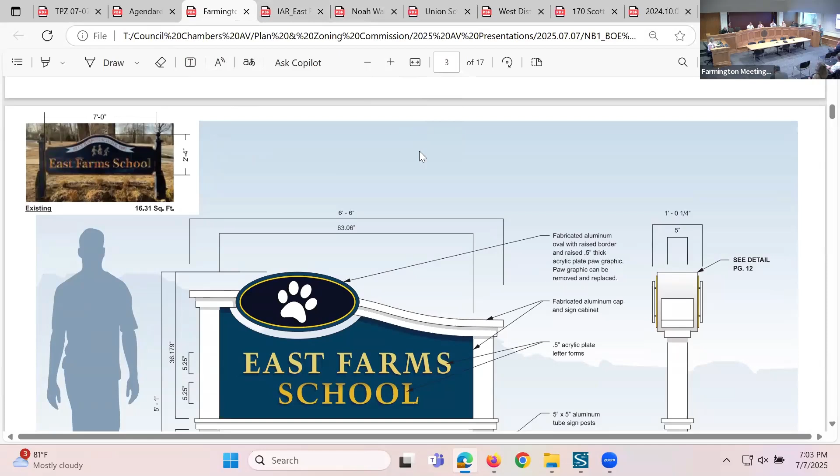Thank you. My name's Lauren Rosen. I own Artfx. We're from Bloomfield, Connecticut. And I just made 119 copies, but I see you have big, beautiful new screens. I don't know if you want copies up close. It probably doesn't matter at this point, but I need just enough for everyone.

Thank you. Thank you. Pass it down. Thank you, sir. Thank you.

Okay, starting with East Farms School. Essentially, we looked at every location and the signs that are existing are older. They're in kind of tough shape. And we decided to come out with a system that was somewhat thematic, where each school would have a logo or an insignia embedded into the sign. And then the sign would feature the name of each school with dimensional lettering. Typically the signs that we're building, we try to use aluminum plate.

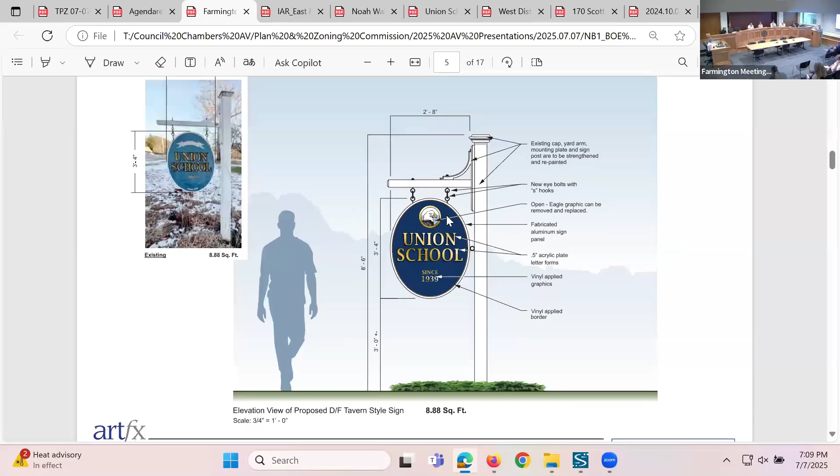We're making a new oval sign, so the sign itself is brand new. That will be welded 1/8 inch plate, with a structural inside of 2x2 tubing, which is also 1/8 inch aluminum. Everything's welded. This particular sign is cut through up top, so that circular component is a see-through, and within that see-through is the school logo or insignia, which is an eagle. So you'll see the same eagle from both sides facing toward the school.

Lettering is raised. The lettering on the bottom, since 1939, is an applied vinyl graphic, which will be a sprayed finish to match the sprayed finish of the letter forms. There's also a cove molding around the perimeter that will also be sprayed a metallic gold to match the lettering. It's new hardware, which is not that significant, but a little bit stronger than what's up there now. And that's Union School.

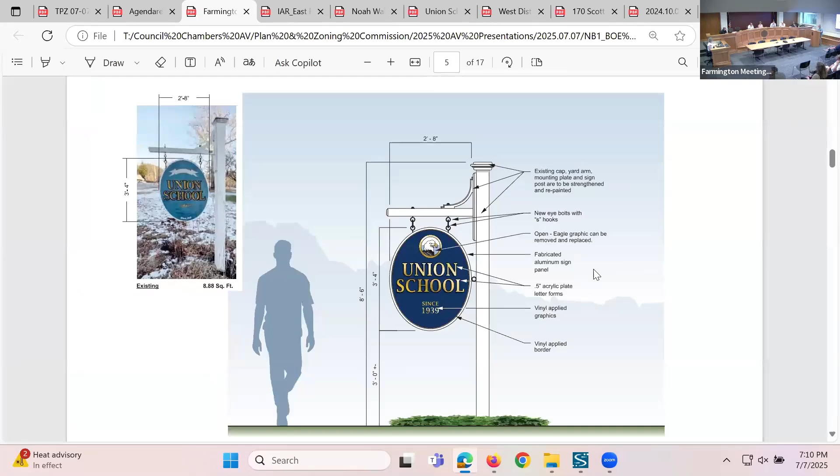There's an existing pedestal at the West District School, which is in fairly good shape. It's a little bit unusual in the sense that it's only a brick's worth thick, which is about 8 inches. One of the thinner pedestals I've seen, but we looked at it and tested it out, and it was actually in pretty good shape. What we decided to do was to manufacture a new capital for the top, a crown molding with an arch in the center.

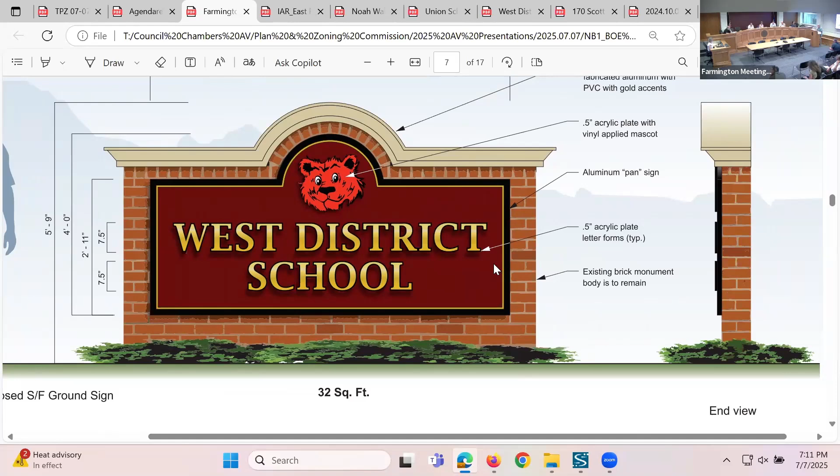It was actually kind of expensive. We tried to figure a way to make it where it wasn't so expensive, and in the long run we gave the school a discount, or the school board. So I think that really gives some substance to that otherwise thin structure. The sign is a one-to-one replacement with the sign that's there now.

It's a dimensional 1.5 inch thick sign that's also 1/8 inch aluminum plate. The tiger, the insignia, appears to be a little bit bright in this particular shot, but that and the lettering, again, are 1/2 inch raised acrylic that's sprayed. All the finishes are low luster. The details in the tiger, along with the eagle, will probably be done with a brush and enamel paint.

Molding is black, and there's a gold inline to match the lettering. I was looking on Google and I noticed that a massive, I think it was either a blue spruce or some type of evergreen, was taken away from this area. So it's a nice freestanding sign without all that encumbrance. It looks nice now.

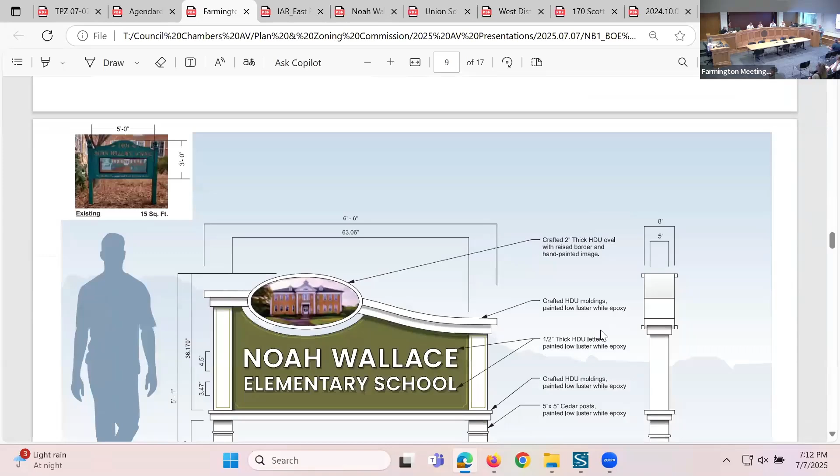So Noah Wallace, we had to be careful, since it's part of the historic district. Same format as the other signs, except that we used kind of a traditional moss green. There's not much of an insignia except for what will be a painted graphic of the old portion of the school. We'll be painting that by hand. Some pretty good artists, so it'll have a nice look to it.

Some added moldings, some insets, a couple of traditional motifs. Lettering in this case is white, also raised, also with an airspace between it and the background.

We talked about this sign, and right away, I think your average person off the street, when thinking about what constitutes a traditional sign, the answer is wood. And we use a lot of wood. In fact, we use tons and tons of all types of wood. Outside, we use cedar, mahogany, teak, cypress, all the traditional woods that have tannin and are self-preserving.

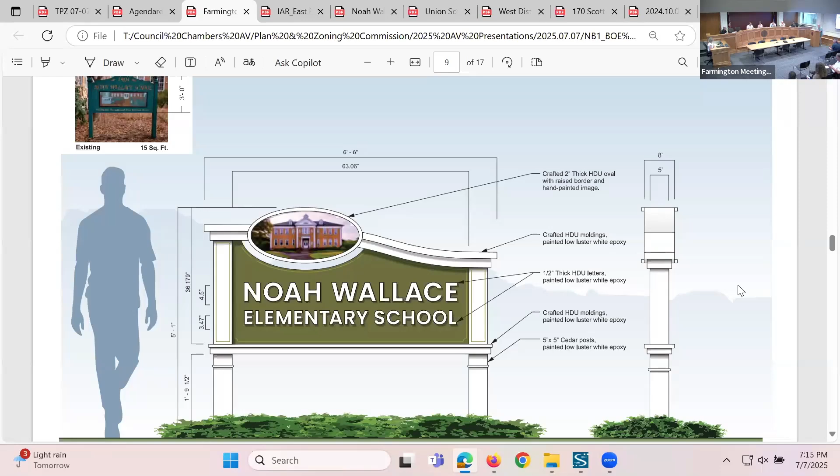So there's a matching ensemble on the building. There's what would be called a directional projecting sign. People are getting confused at times, I don't know if it's new visitors, but there's some confusion about where the main entrance is to the school. So what we did was we selected a tavern style projecting sign.

Again, the same type of materials. The bracket's a custom bracket up top. It's wrought iron - well, we actually mill it from aluminum, but when it's done, it looks pretty much like wrought iron. We throw in a second color around the arrow to give it a little bit of accent, and the lettering, again, is dimensional. It's a sister paired sign with the ground sign that you saw.

A little more work at Irving Robbins. We were out there doing a survey, and a woman who I assumed to be the principal or one of the administrators came out and said, if you're looking at signs, we need something to identify the front of this school. So we looked at it, measured, took pictures, and we're putting in dimensional letters on the front of the school as a secondary ID sign.

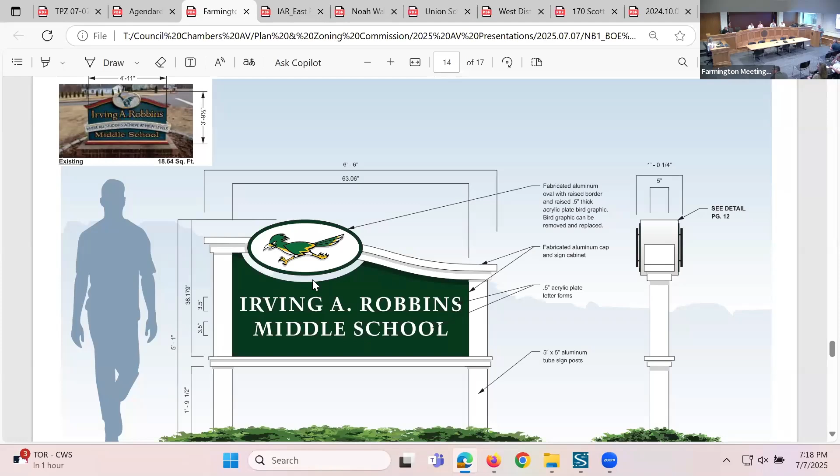Then there is one other sign, a secondary directional that we're posting at the corner, where there's a secondary entrance to the athletic fields. It directs people, one, to the athletic fields, and two, to the main entrance. There's apparently some confusion there where people take that secondary entrance looking for the main entrance. But the administrator and the folks we worked with felt it'd be a good idea to tell people main entrance this way.

Same materials: all structural aluminum posts, structural aluminum signs that are about 1 inch thick. For this type of sign, the footings are 42 inches with an appropriate amount of concrete, and again epoxy finishes that are low luster architectural finish. There's a skirt on the bottom of this post that's probably going to be made of PVC that's sprayed to match.

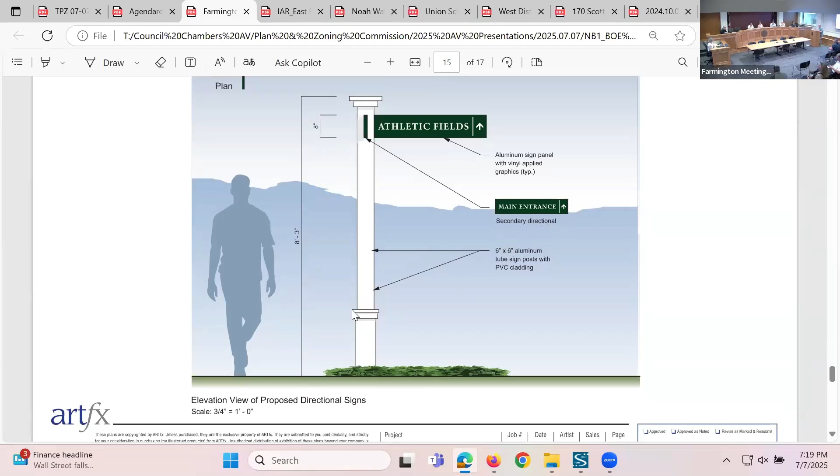And I'll be happy to answer any questions.

Thank you very much, sir. Do you have any questions? No questions, great presentation. Okay.

Peter, how about you, any questions? No, thank you for the presentation. Thanks. Okay, Bruce, just one - what's on the back of the West District sign?

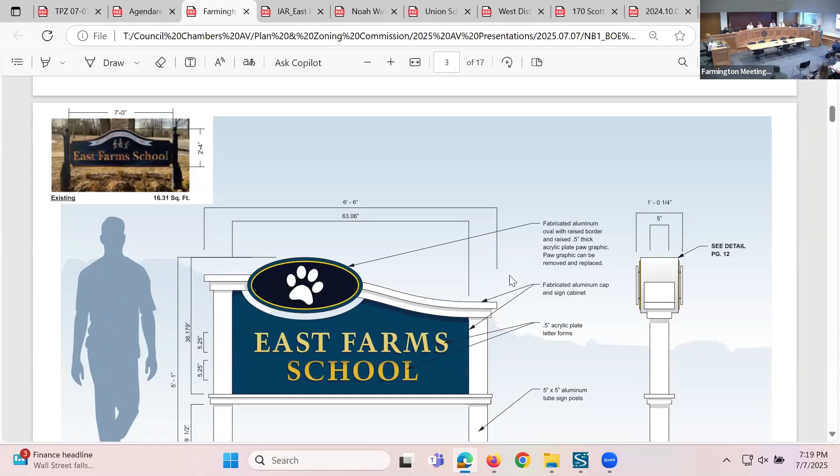Because the others look like they're all two-sided. There's actually brick, there's nothing - it's flat, and it faces the school, the fields. In this case, we maxed out the square footage with the front presentation, which is just under 32 square feet.

And it's been like that for some time, right? Yeah, the brick thing. If it was my property, I might think about three small bushes with some sedum, just to dress it up a little bit.

Right, that's sort of where my head was going with that too. I was wondering if we'd had any issues with graffiti or anything like that at any point, but I guess not. If it's been there for some time, it won't attract anything like that. All right, thank you. Yeah, thanks.

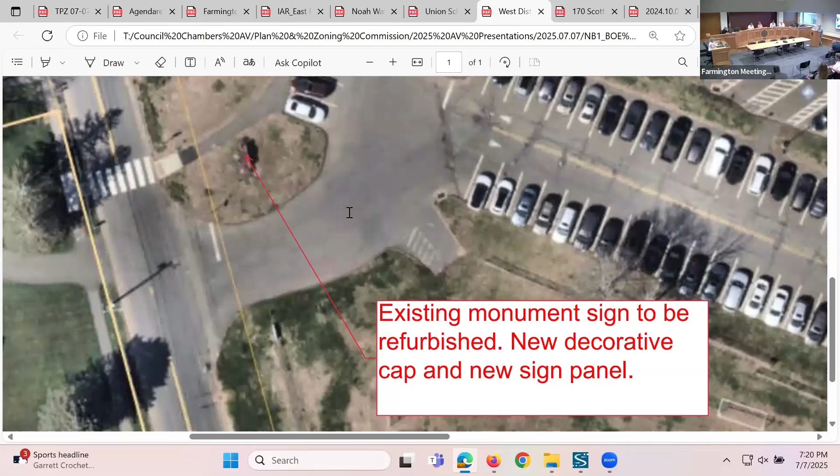Okay Mike, any questions? No questions, thank you for the presentation. Thank you. And Dave?

Hi, nice presentation, these look great. Thanks so much. It's nice to see them and get an idea of what you were thinking behind it. No questions.

Okay, and now it's my turn. My one question is one that I don't know if you can answer. It might be a Shannon question.

Is Union School in the Unionville Historic District? No, it is not. Oh, okay, interesting, I just didn't know. Noah is, but Union School is not.

So the Noah Wallace sign will go to the Farmington Historic District on next Tuesday. But yeah, I was just curious. I wasn't triple sure, but I'm 99% certain it's in the Unionville District.

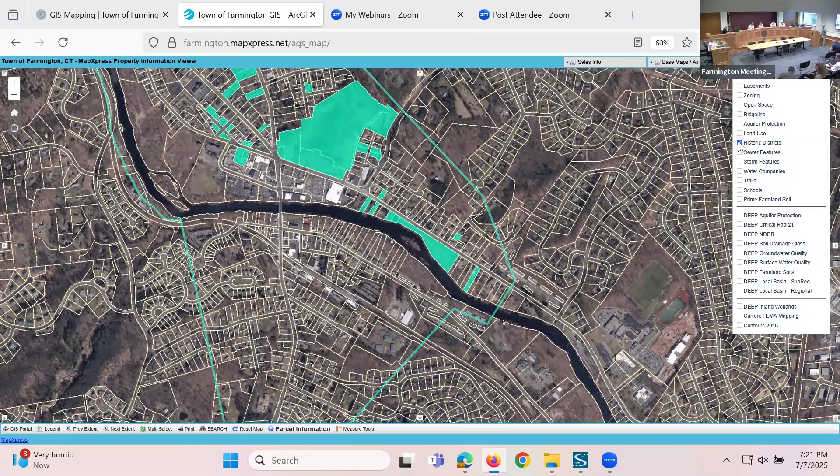Thank you. Our Board of Ed member and a Unionville Historic District member. Thank you, Matt, I appreciate that. I'm pretty sure I double checked that, but yeah, I thought so too.

Okay, thank you. Well, I agree that the presentation is great. I think the signs will be a lovely upgrade, and I assure you they'll last for a long time. When I first started the business 43 years ago, I used to be proud to give these lifetime warranties, but now that I'm older, I think...

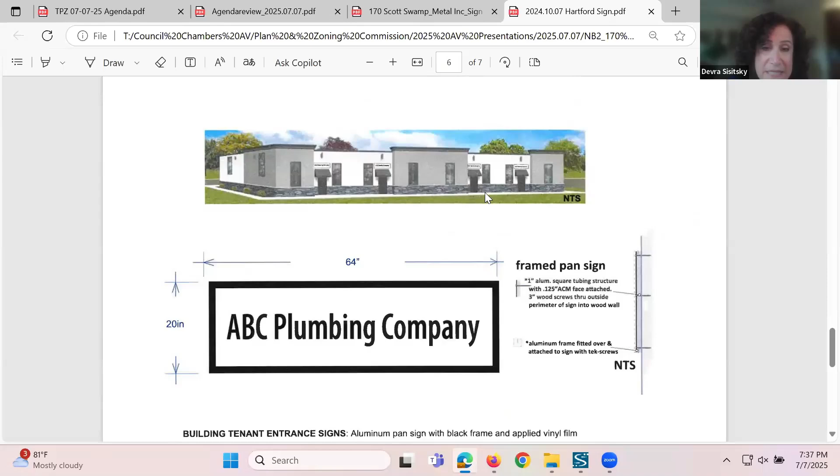I think you guys have seen this before in October when the landlord and Shannon did a great job to go through the plans and okayed these signs for the 4 units. I think what nobody contemplated was that someone might take 2 units and therefore not need 2 signs a few feet apart. So I think you guys did a great job to preserve the clean lines and look of Farmington. When we walked by with Bruce and the landlord, I queried if there's any way to get 1 sign instead of 2 redundant signs to make it cleaner and simpler. You suggested this might be an appropriate line of play to propose to planning and zoning. So we've put together this drawing of the sign, exactly the same as what you approved for the 2 smaller signs, and it's under the 40 square feet at 37.9.

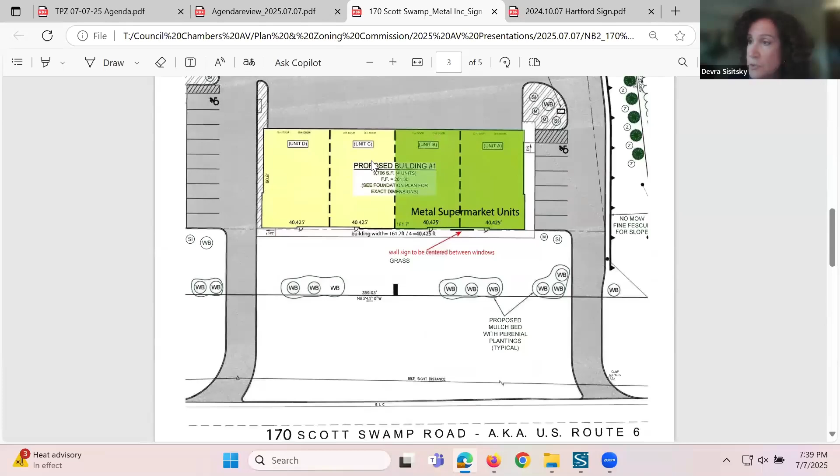I think a larger sign is a little easier to see. I'll speak as a new business owner to the area - I haven't had a business in Farmington since the late 80s, but happy to come back. It's a tight corner coming down route 6 heading towards Bristol, right under the canal sign, and I think a slightly larger sign would be more feasible for people to see and not apply the brakes quickly as they're pulling in. So I'm hoping you'll give me permission to have 1 sign instead of 2 redundant signs, making a slightly cleaner look to the building.

Okay, thank you very much. Commissioners - Bob, no questions, it makes perfect sense to me. Peter, no questions for me, thank you for the presentation. Bruce, no questions for me either. Mike, no questions as well. And Dave?

I don't know if I missed it - is there any lighting on this sign? No. Okay, that's my only question. Yeah, there is an existing wall pack on the building that matches the layout for the entire building. There's another mirror wall pack on the other half. The sign happens to be under that wall pack, just how it's centered between the 2 windows. Oh, okay, thank you.

Okay, I guess it's my turn. The lighting was going to be my one question. It does keep a simple look and is easier to see. Okay, I think all my questions have been answered. Thank you. Are we ready to vote, everyone?

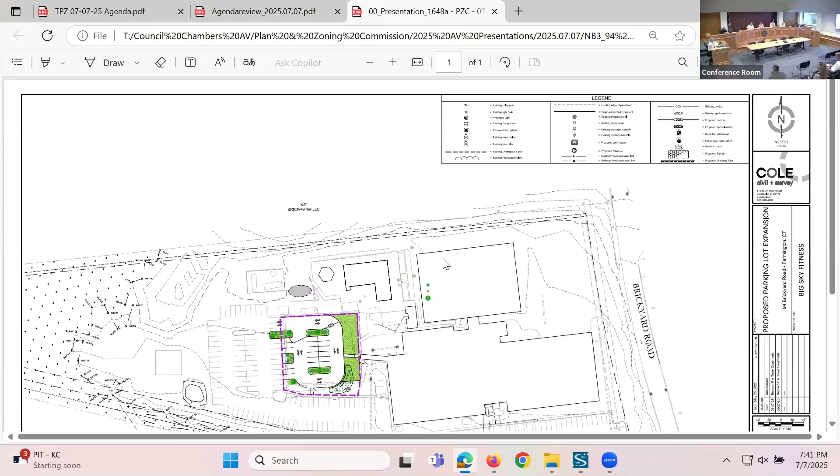Brian, are you there? Yep. Thank you very much, Shannon. For the record, Brian Panico with Cole Civil and Survey, here on behalf of Big Sky Fitness. So this is an existing site.

We went through a few years back with an application to change us to a Big Sky Fitness. There were some improvements done at that point. Everything is now complete, and as they're kind of transitioning and moving forward...

There's an existing clay tennis court on the site, and it is not used. At this time, they would like to transfer that from being a tennis court into additional parking, as they need more. So in removing the tennis court, the fencing, and all the surrounding impervious area, we'll be replacing that with 18 new parking spaces.

Area of development is about 0.42 acres. The site as a whole is 10.5 acres, and we're only proposing modification to basically the area highlighted in purple there, which is less than half an acre.

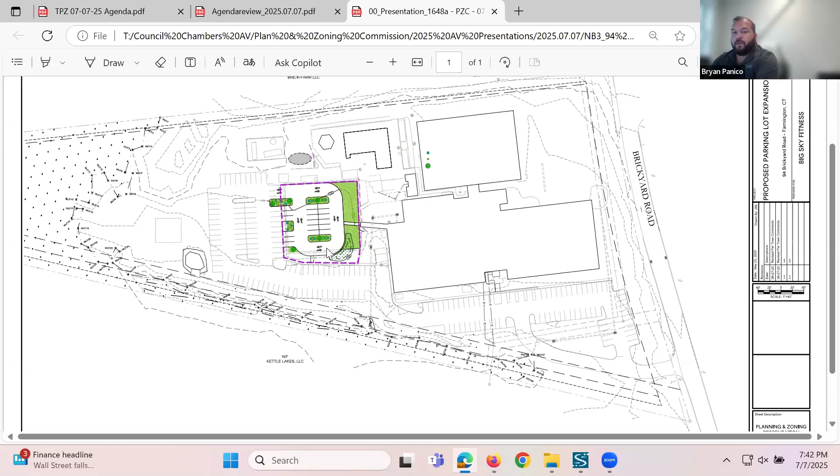We've added 1,678 square feet of additional interior landscaping. You can see that represented in those parking islands, and most of those areas were impervious surface that we're now turning into pervious landscape area. We're also proposing to add 5 new shade trees and a bunch of other landscape plantings in those islands, just to improve the overall look of the parking areas, particularly up against the building there.

We've also looked at this from a storm drainage perspective. While the tennis court was considered impervious surface, the areas with that hatched green dotting throughout were areas of impervious surface that we are now making pervious, or grass. So we've reduced the actual impervious coverage of the site by a little over 3,000 square feet.

There's a recent change from the previously submitted plans. Where Shannon's cursor is there is now a water quality depression. Originally we had those in the landscape islands as little low points. We've since modified that so that in the event that water quality depression does overflow from stormwater runoff, it will be directed to flow toward the existing catch basin to the east in the parking lot.

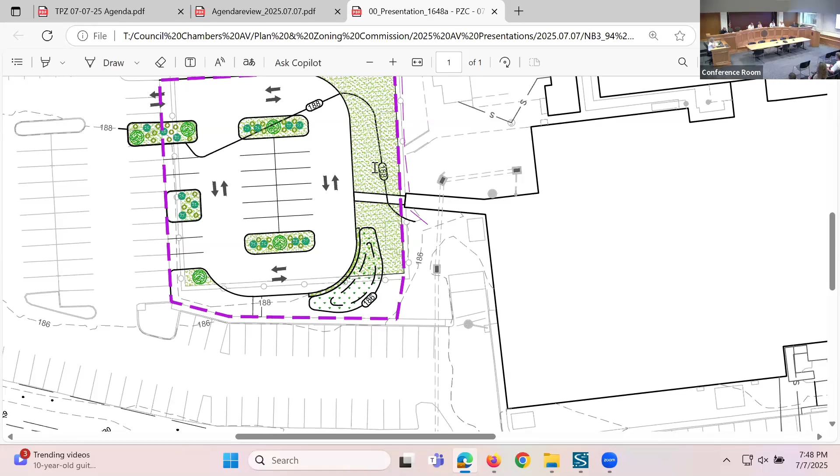Mike? I guess my only question is, do you plan on doing this construction during your business hours? I know from driving by that you guys could probably use the parking spaces because it's always so packed. Do you plan on doing it before, after, during, and would that cause any issues for people who use the gym?

I think just given the hours of operation, a lot of the work would likely have to occur kind of simultaneously, especially just to get it done in a timely and efficient manner. But what I will say is the way we've generally tried to set this up, we're trying to minimize the impacts to the existing parking lot as much as possible. So essentially the 3 parking spaces where you would enter or exit this new parking area would be eliminated in the northwest there.

I would foresee that as almost becoming like a small staging area right up top there. So they could bring equipment onto the site. They could literally back a truck up in that parking area and be loading a truck. So I don't foresee a lot of adverse impact to the existing traffic, especially since this isn't the type of use where people are only in there for 5 minutes at a time very frequently, kind of in and out. People generally are there for a decent amount of time. And I think overall, with some small safety measures, it shouldn't have too negative of an impact on the actual experience of the gym goers.

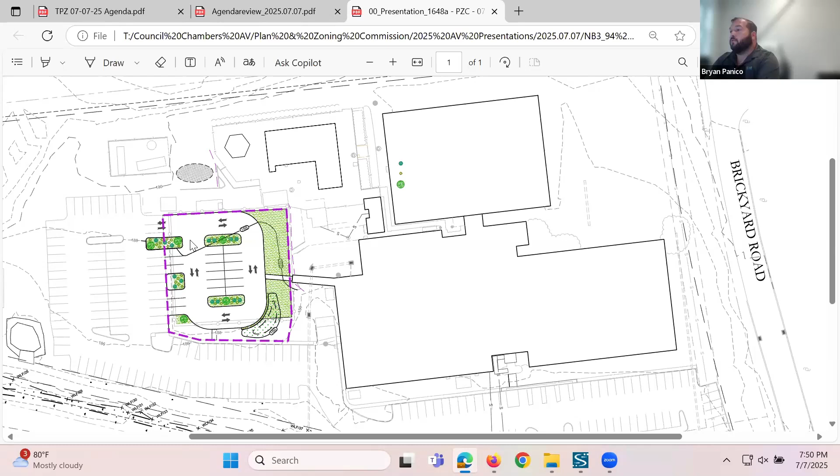Hi, yeah, thanks. Just verifying that you're not going to add any lighting to this area? Correct, we have not proposed any new additional lighting in the area. Okay, all right, thank you.

Okay, I will say that most of my questions have been asked. Thank you for the presentation and the visuals, it's very helpful. Okay, any other questions or concerns? Anything come up? Councilors? Okay, commissioners, excuse me.

Okay, I need a motion and a second, please. Okay, I make the motion that we accept the application for WC Farmington LLC, Big Sky Fitness, 94 Brickyard Road, application for site plan modification for the removal of the existing tennis court and fencing for a proposed new parking area, CR zone. Second. Okay, all in favor? Aye. All opposed? Abstentions? And the motion passes.

Thank you. Thank you very much.

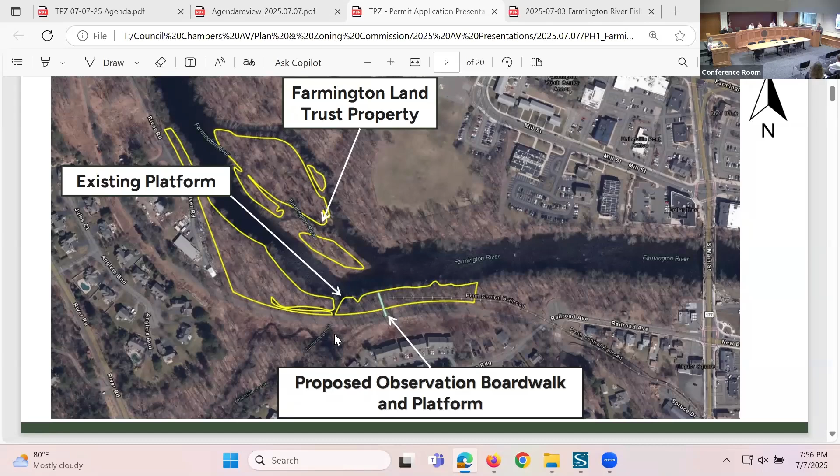The green line represents the area where we're looking to place the new observation boardwalk and platform. Just to the west of that is where the existing fishing platform exists, basically at the confluence of Unionville Brook and the Farmington River.

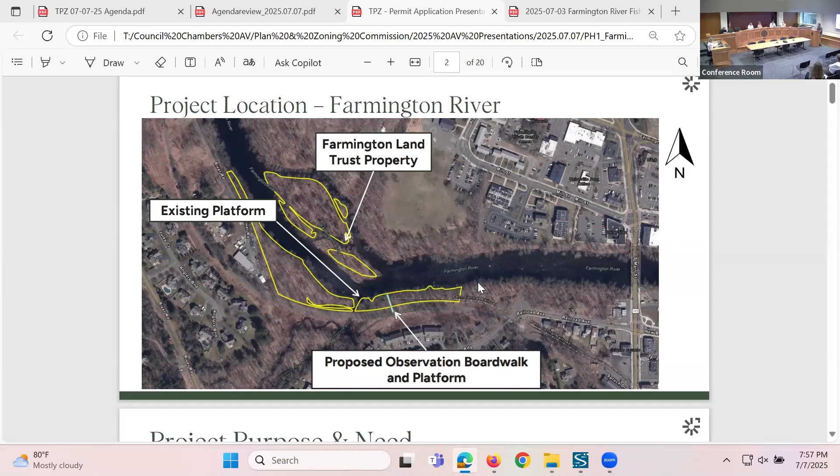This shows why the fishing platform doesn't work where it currently does. It's on the outside bend of the Farmington River, so during large flood events, all the debris and floodwaters move directly toward that bank and want to scour out anything in that location. During the wintertime, when you have ice jams, the flow moving down the river again pushes it to the outside bend. This causes potential dislodgement of the existing concrete blocks that hold the fishing pier in place, as well as dislodgement of the metal railings currently there. They've been knocked over a few times, and the Farmington Land Trust has had to reset them.

We have several project purposes, which we've gone through this evening already. The meeting goals are to introduce the project to this commission, understand how it will be constructed, and what the implications are on the floodplain and floodway, because that's what we're here for. It's a special permit because we have a structure proposed in the Farmington River floodplain as well as the floodway.

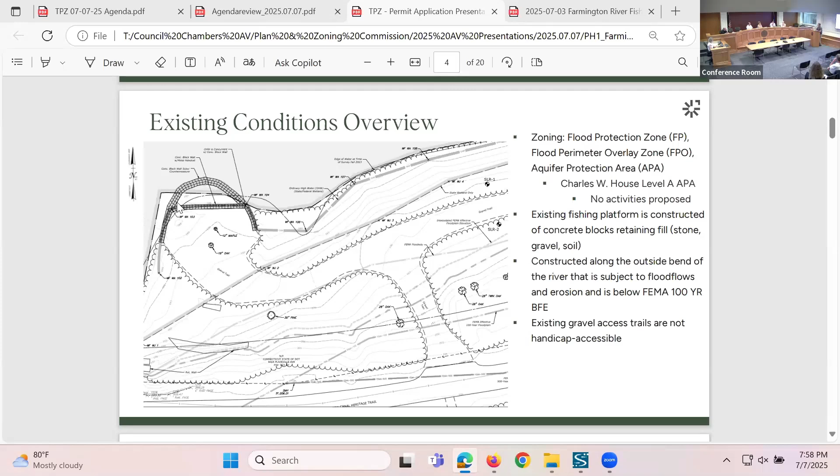Existing conditions: this is really a twofold project. They're almost considered separate projects by other regulatory bodies. This is the existing fishing platform location. It consists of two structures: an existing concrete block structure with a metal railing that's more landward, and at some point the Farmington Land Trust added additional blocks out into the river to try to deflect waves and energy away from those original concrete blocks. That's why you see two different block systems at this fishing platform. It's accessed by two gravel trails along the paved section of the Farmington River Trail — the closest one is steeper and not handicap accessible, while the other, flatter one is more handicap accessible.

It still has some areas that are greater than 5%, but is considered somewhat handicap accessible.

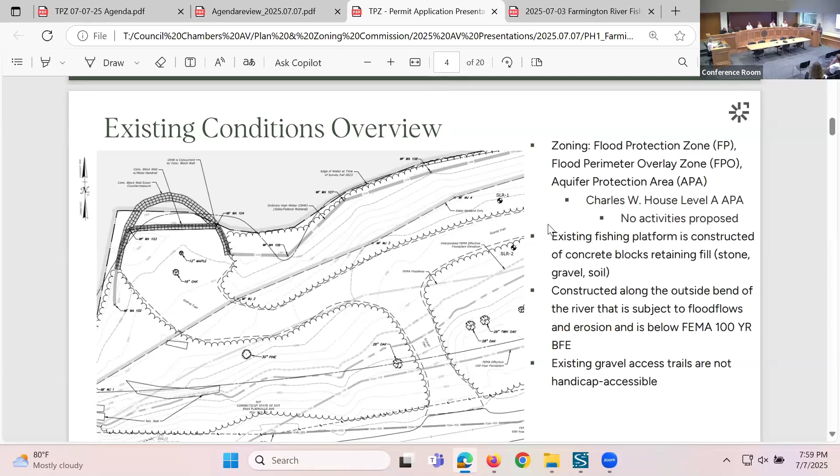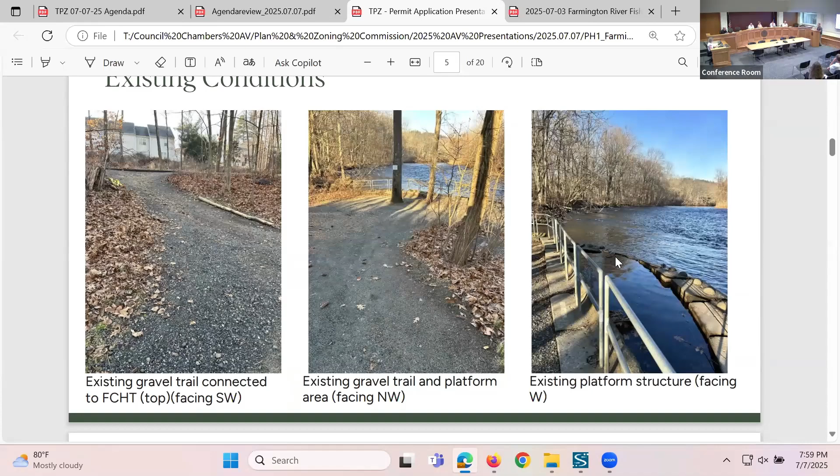Next slide, please. Some photos of the fishing platform area. The upper, or left-hand one, shows the steeper entrance from the trail down to the fishing platform. The other photos show the actual fishing platform, with the metal rail, the concrete blocks, and the secondary blocks out into the water that help deflect waves and velocity away from the fishing platform.

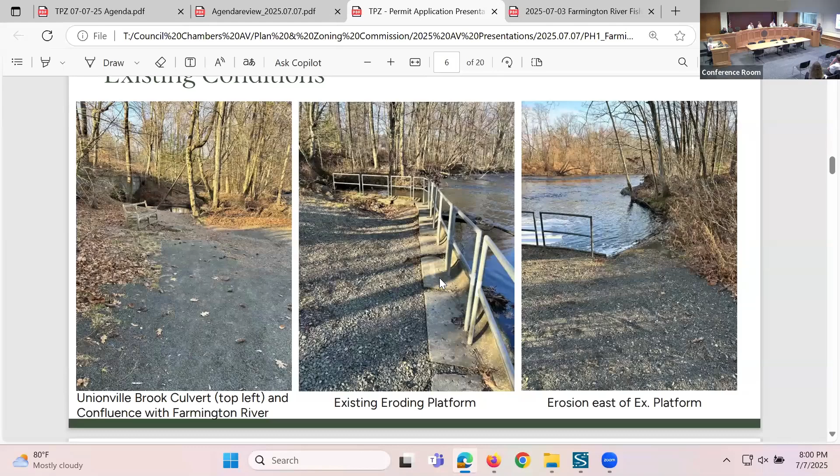Next slide, please. These are just showing you the gravel paths. This is the gravel path that is more handicap accessible than the steeper one.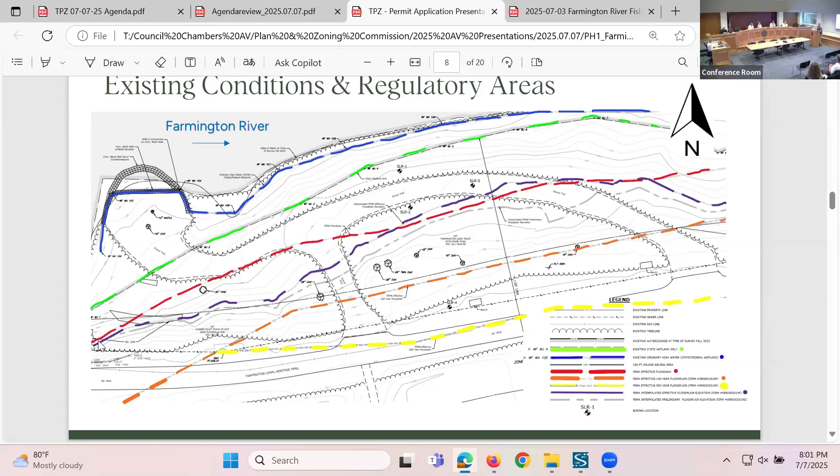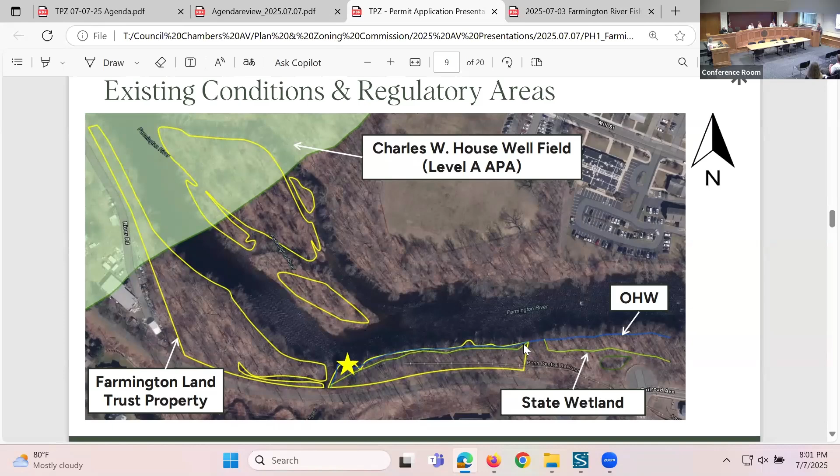We're also located in the aquifer protection area, the Charles W. House well field owned by Connecticut Water Company. You can see in the green hatch, we are well outside of that well field. We have no anticipated adverse impacts to the well field based on removal of the fishing platform and construction of a new observation platform or boardwalk.

Next slide, please. So here we'll walk through proposed conditions at the existing fishing platform that will be turned into a natural bank. What's represented here in blue are activities below the ordinary high water mark. The removal of that secondary, outer, waterward-most set of blocks - those will be taken out. The fill between those blocks will be taken out. And then eventually that next set on the landward side, shown in green, and some of the gravel, will all be removed from that section of the riverbank.

On the right-hand side, you see a cross section of what will be replaced. We'll be replacing that with natural boulder revetment. The rocks will be sizable - you're looking at anywhere from 60 to 72-inch diameter rocks, so large rocks. Because of the velocities we have out here, our water resource engineers had to design and size those rocks in accordance with the velocities associated with flood events for this particular outward bend of the river.

Those boulders will be cantilevered, as you can see, stepped back. We're not anticipating putting any railings back on this. We do have a lip, as you can see on the upper boulder, that would prevent if somebody had a wheelchair or some type of apparatus with wheels from actually going over those rocks - it would stop it like a bumper.

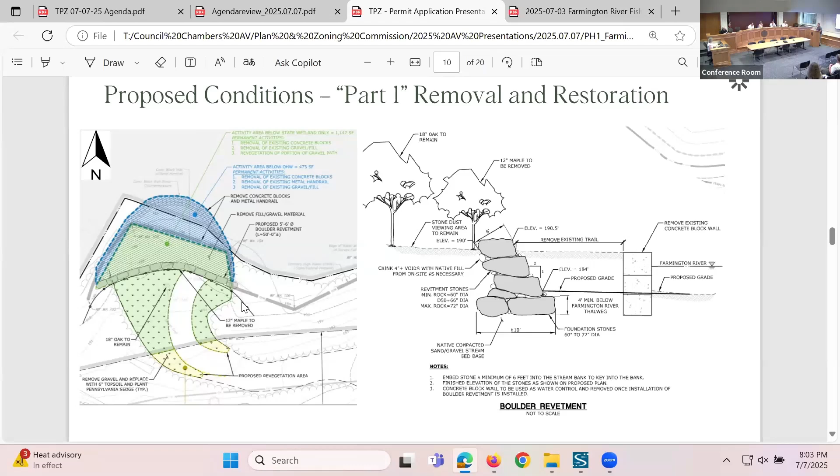Next slide, please. So this is part number 2. If we're removing the handicap accessibility component of the fishing platform, the Farmington Land Trust still wanted to provide an opportunity for people with disabilities to be able to view the river. We've moved that opportunity slightly downstream, to a location that doesn't require a lot of tree clearing.

Working with the National Park Service, one of their concerns, given the wild and scenic designation, was to minimize the amount of tree clearing along this particular riparian zone of the river. So we found a location that made more sense and minimizes that clearing. We'll go through some photos shortly - you'll notice there are very small saplings involved, and the larger trees you see in those photos would remain.

In yellow on the left-hand side is the boardwalk section, approximately 80 feet long and 6 feet wide. The observation platform that extends out over the water is 16 by 16, and it cantilevers out over the water, getting folks out over the water so they can look upstream and downstream at this location.

It will attach directly to the Farmington Trail. We've been in coordination with Connecticut DOT rails as well as the town to provide permission to access that portion of the trail, because part of the area at the very end of the boardwalk is not owned by the Farmington Land Trust.

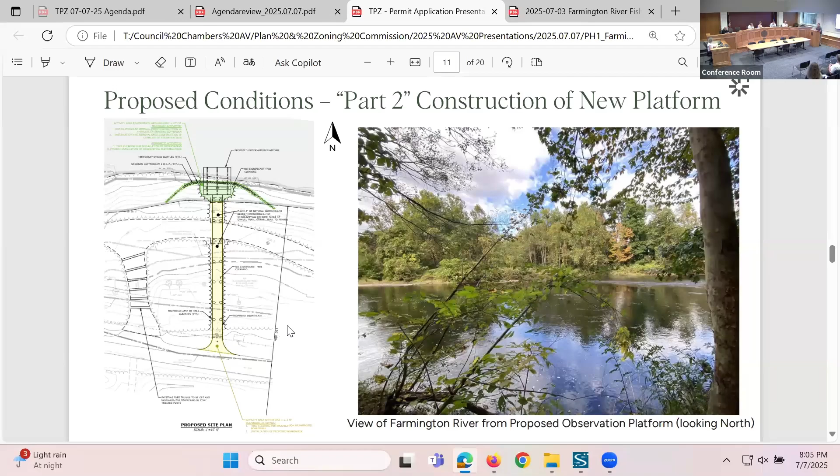The large tree to the right would remain. The large trees to the left would remain. Again, this is only a 6 foot wide boardwalk. In terms of equipment to install it, it doesn't require large equipment - it would actually be skid steer size, bobcat size equipment. Hence the reason we can keep the larger trees in place and not have to clear those.

The second, middle photo is looking from the gravel trail. So the river would be behind you in the photo - you're looking back up towards the paved trail. And again, notice we've got a nice, probably 10 to 12 foot wide clearing of smaller vegetation in that area where we can place the boardwalk.

The photo on the right-hand side shows you the existing trail that the boardwalk would go across. The boardwalk is set at an elevation approximately 7.6 feet above that trail, so you can still walk under it. You could potentially bike under the boardwalk as well, but mostly we're looking at pedestrian walking under that boardwalk.

Next slide. Here's some photos with the leaves off, so it makes it a little more clear what it looked like in wintertime. Again, you can see the arrows pointing on the left-hand side from the trail out, and this one pointing right at the trail. And you can see on the bank itself of the river, we've selected an area that requires minimal tree clearing - there's a nice gap that allows us to get out over the river in that particular location.

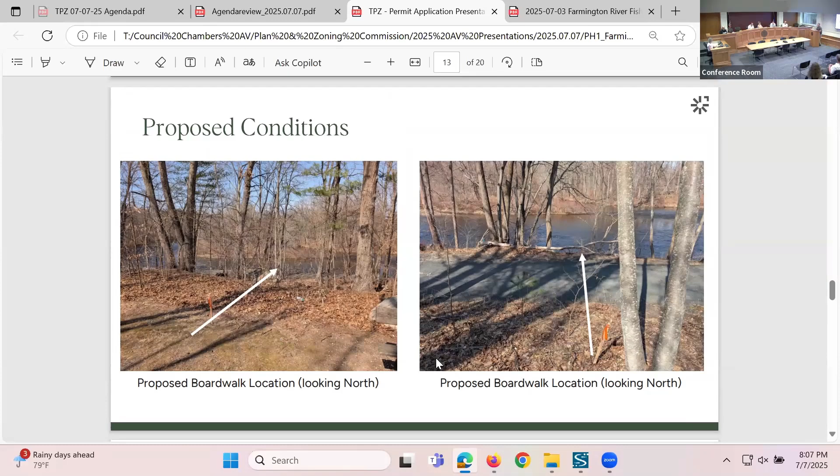Next slide. Again, it's kind of important to point out the resource areas here. I think the ones to pay particular attention to are the red line and the orange line - that's your limits of the floodplain or floodway from the river itself. We will have some piers and piles associated with the new structure in the floodway and the floodplain. We'll get into that in a minute.

This gives you a nice overview. This is important because this is from our pre-application meeting with town staff. One of the concerns with the boardwalk was whether it would be wide enough to convey 2 wheelchairs at one time, and this graphic shows that 2 wheelchairs could be - one going into the boardwalk, one coming out at the same time. So we've designed it to have that ability. This also gives a good indication of the larger flat 16 by 16 platform that cantilevers over the river on the right-hand side. And I think we're ready for the next slide.

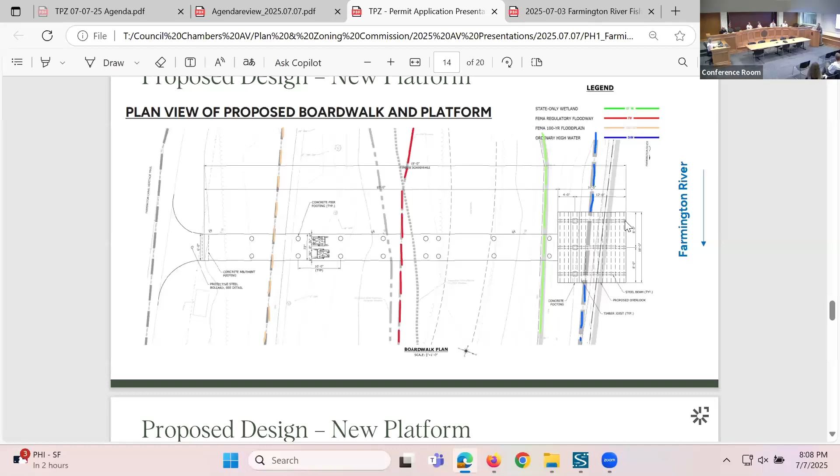So what is the new platform and boardwalk going to consist of? As I said, it's 6 foot wide. The actual construction would include concrete piers placed below the soil surface. In some cases we have concrete footings based on calculations our structural engineers ran to understand the velocities during a 100-year storm, the horizontal forces during a 100-year storm. So if you have debris coming down the river from upstream, what would be those forces on the piers themselves? Would they break? Would they stay in place? We've designed them for the 100-year storm to stay in place.

You'll see a rendering later on that shows what this is all going to look like when it comes together. Other things I'd point out here is the FEMA elevation at this location.

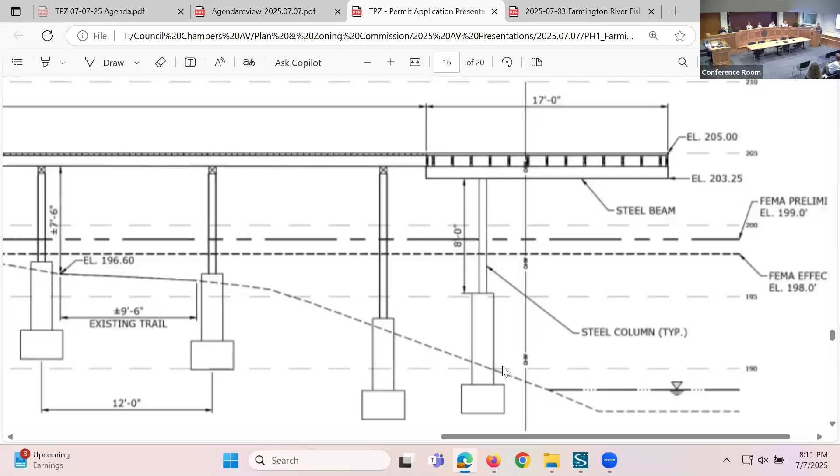We are outside the ordinary high water mark of the river, so this will all be on the actual upland areas, with the exception of the first footing, which will be in the state wetland. It's not a poorly drained type of soil—it's alluvial, well-drained soil. We did borings out here to figure out where bedrock was. Bedrock is very shallow at this particular location, which makes sense as you get towards the river. If you've been along this bank you'll notice big rocks jutting out of the soil. As you move further away from the river and up towards the trail, you have more fill, so the bedrock gets deeper, and in those cases you likely will not be on bedrock.

For the footings, they'll be pinned to bedrock where it's shallow enough. In areas that are deeper, those will be sonotubes down to 42 to 48 inches, and concrete will be poured into those.

I think it's important here, as you can see in black, there's a couple black horizontal lines. Shannon, point out the elevation 199, which is the new floodplain elevation. You can see how it goes across, and we have 1, 2, 3, 4, 5 columns—yeah, 5 columns that'll actually be in the floodplain. And as you can see, those columns are really minimal in width, about 8 inches in diameter.

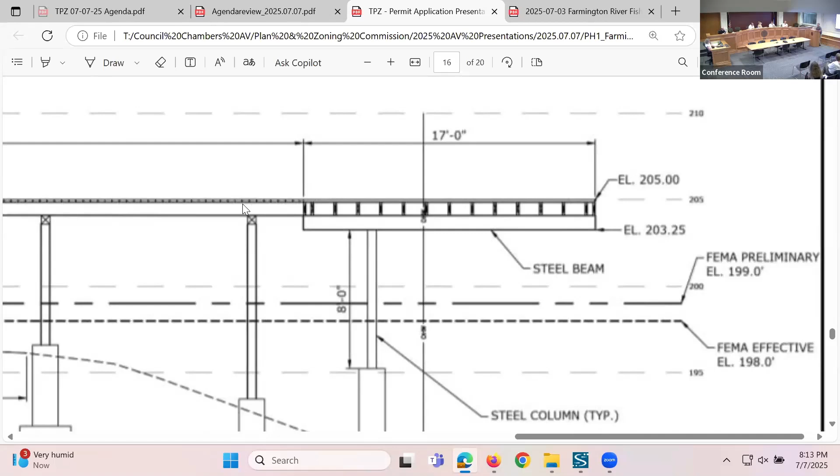This also shows you the low chord of the platform. The platform will actually have the lowest chord at 203.25, then the boardwalk slightly higher from that floodplain. So again, important to note, we're above the floodplain with the actual boardwalk and platform. Next slide, please.

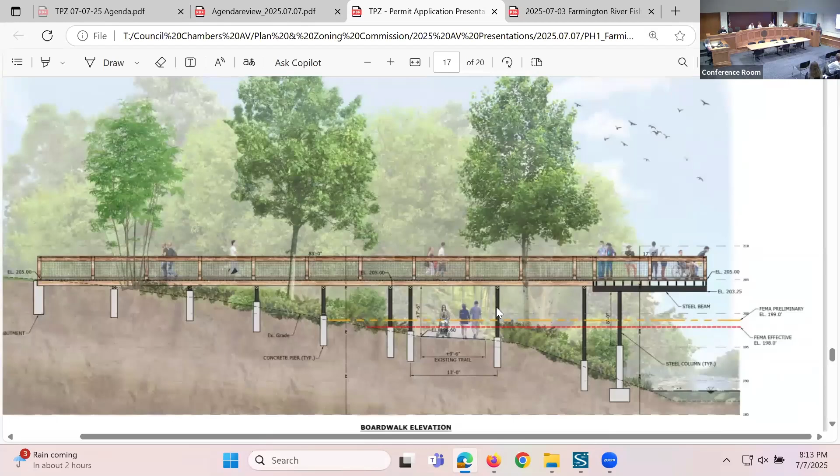So this is what it will look like when it's constructed. We've shown you in orange and red the 2 current FEMA lines, or what will be—the red is the current FEMA line, the orange is what will be proposed or effective this year. Again, this gives you an idea of what the leggy fencing looks like, and the rails, as well as keeping the trees as much as possible out there along it. The vegetation there will be herbaceous vegetation that grows underneath the boardwalks, specifically as you get closer to the river, because you're really getting high—about 10 to 12 feet above the river, in some cases 14 feet at the observation platform.

I think next slide. Most importantly,

The reason why we combine the two projects is that if we were just proposing the boardwalk and platform, we'd have a net fill in the floodplain unless we were going to dig somewhere around it. By removing the existing fishing platform, which has a considerable amount of fill, close to 240 cubic yards, that's like 12 triaxle fulls of material, if you think about it. That's going to come out, right?

And then obviously we're replacing that with some natural boulders, and then we have the small piles that are going to support the boardwalk that go into the fill number. So when you compare our approximate cut of 240 cubic yards to our approximate fill for the proposed improvements of 34 cubic yards, you end up with a net cut in the floodway and floodplain of 206 cubic yards, restoring the floodplain volume back to this part of the river with this project.

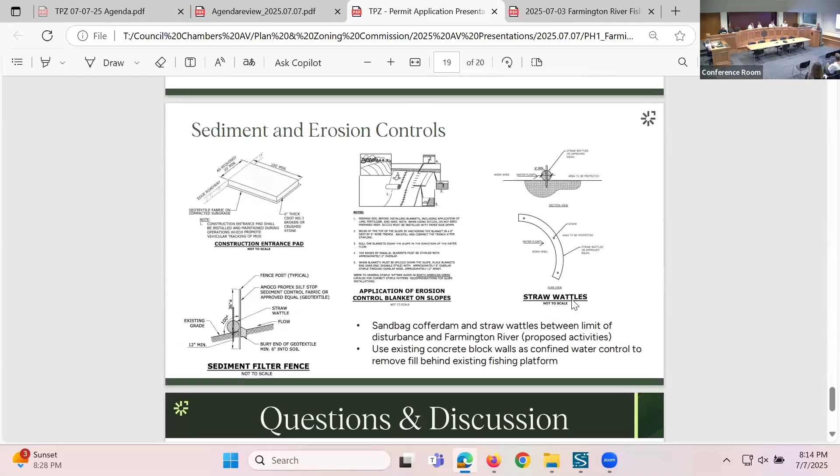Next slide. Next slide. Questions? Yeah, I think that concludes the presentation this evening. Happy to answer any comments the commission may have.

Well, thank you very much. Appreciate that. Okay, commissioners, we'll start with our questions. Bob? Okay. Great presentation, thank you. I'm just trying to wrap my head around everything, so bear with me.

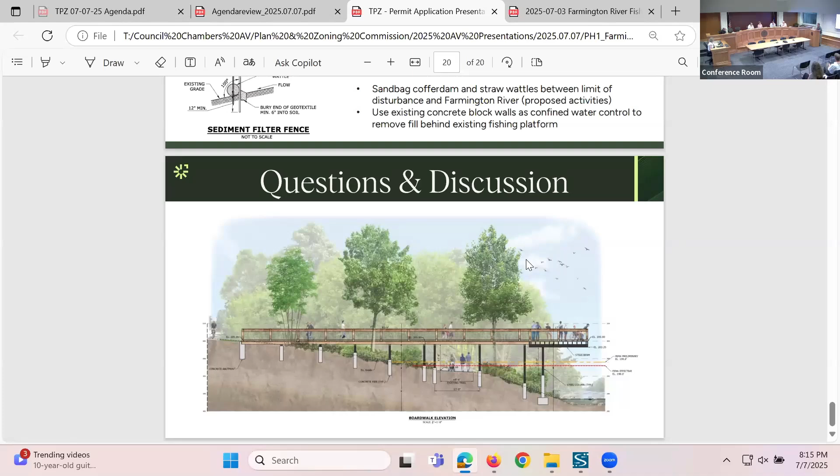The stone wall that's going to be cantilevered, not the one—is that going to be dry fit, or is that going to be mortared in? Yeah, so it's all dry stack stone, because you're using very large material. Actually, the mortar would be frowned upon by DEP Fisheries Division. They don't like us using mortar in areas that are aqueous, since it could be released into the river. So all dry. Okay, that's why I was asking.

You mentioned that this is going to be a lot of bobcat work or skid steer work, to be correct. And it's going to be 6 feet wide, but that doesn't really make a lot of sense to me. How are you going to get the concrete back there? How are you going to get the piers back there? How are you going to get the steel beams back there?

Sure. So two things—you have two different projects. I didn't really talk about what equipment would be used for the bank stabilization. A bobcat or skid steer can't handle 6 foot diameter stone, so that'll be a larger excavator type machine that would walk down. The existing gravel path is probably about 15 feet wide now, so that would be the main access down to the actual fishing platform.

A big machine would remove the concrete blocks. I didn't mention this, but the concrete blocks are going to be reutilized, or at least taken by the Public Works Department for reuse at some point down the line for other projects.

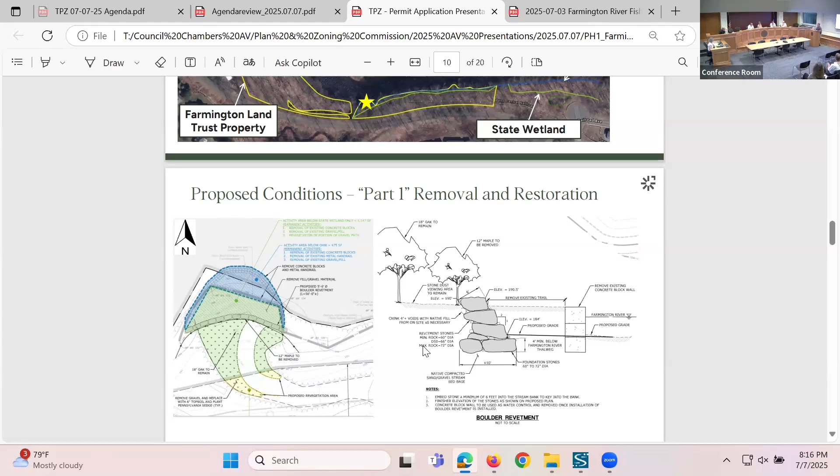The boardwalk itself, though—a lot of these boardwalk trails, if you've been on different trails that have these crazy suspension bridges and things of that nature, most of that stuff is actually constructed with really small equipment because it's hard to get into sites. Based on our structural engineers who have done quite a few of these type boardwalks, the actual concrete could be pumped in from the trail itself because the trail is not that far. So they can just pump it in. They'll do the forms, the fittings with a small machine.

There's not going to be a lot of excavation because of shallow bedrock. You're only going down 2 feet in some areas, and then you're doing your form and pinning. The actual steel beams aren't going to be very heavy—they're only H beams being placed out there. They could use a small excavator if they wanted to. We're not limiting them to bobcats and smaller equipment, but we are trying to limit them from having to have big swinging equipment where they have to take down a bunch of trees.

And that's why I'm asking—like, yeah, I know you had mentioned 6 feet, and the swing is gonna... Yeah, and so in the section where the gravel trail isn't currently, above it between the paved trail and the gravel trail, we're looking at smaller sized equipment.

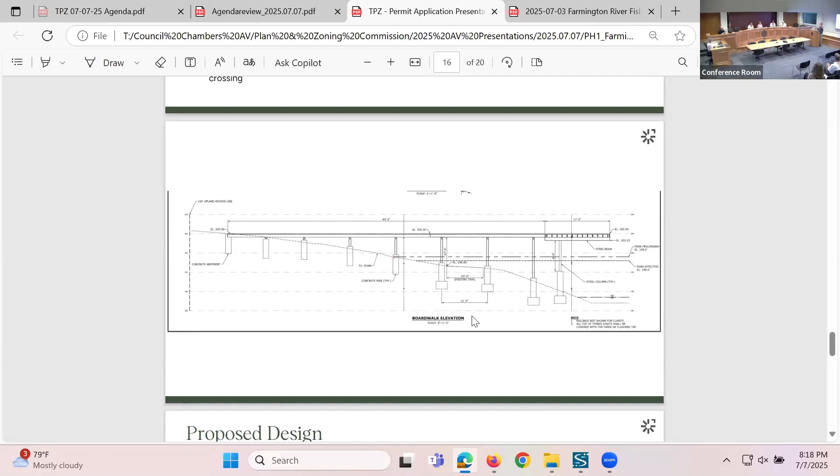Down below where those steel beams are going to be, they could actually swing something in there because it's already open and on the gravel trail. That's where you're starting your cantilever, so it'll be a combination of equipment.

At the end of the day, the Land Trust's goal, along with the National Park Service, is to minimize the tree clearing as much as possible.

For federal permits, we will need a self-verification notification form, general permit number 12 for bank stabilization, which will be going in this week to the Corps of Engineers. We do not need a DEP permit since there's no state money currently allocated to this project. If there was state money allocated, then we would be going for an FMC. So the permits required for this project are the local wetlands permit, which we've already received from the town, as well as the Army Corps permit.

I'm assuming you want to try and get this done during the summer when the river's at its lowest. Ideally, you'd like to do this work sometime in August or September, when flows are at the lowest. It's easier for a contractor to work along the river, specifically the fishing platform area, because that's the area that actually juts out into the river. The boardwalk work could be done during the fall into the winter if it had to be.

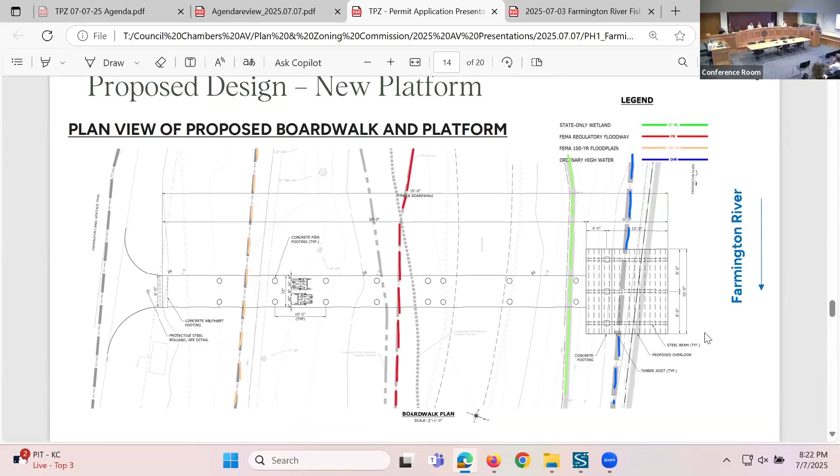I was wondering how far out from the existing tree line does the boardwalk extend approximately? If I had to guess, since I don't know exactly where the tree line is, I'd assume it's roughly 8 to 10 feet out into the river itself, because that's a 16 by 16 platform. The trees start about the blue line, on the west side of that blue line. So if you cut it in half, you're looking at about 10 feet out.

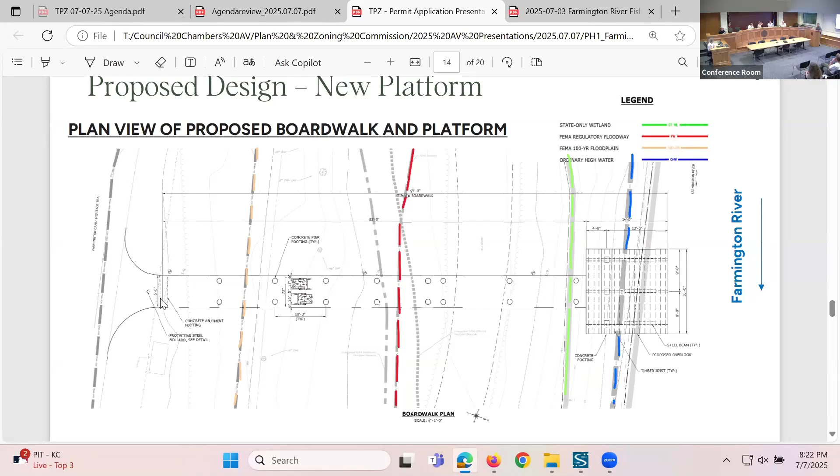And I'm sorry, also from the other end, from the entry point of the boardwalk ramp coming in from the paved trail. So what was the question related to that part again? I guess just how far is that distance, like how much boardwalk are you going to be seeing from the tree line to the? Oh, okay, I see what you're saying.

I also didn't mention, and I should have, because this was another engineering comment - we're also placing a bollard at the end of the boardwalk so that ATVs or any other type of off-road vehicle cannot drive onto the boardwalk. And that's a removable bollard - if for some reason maintenance had to be done out there, it could be done. So that was also added to the plan. I'm sorry, I failed to mention that.

And then in terms of the platform itself, what's the occupancy capacity of it? And do you know if there's any plan to have seating on the platform or not? There isn't any plans currently for seating on the platform. It's strictly standing observation at this point.

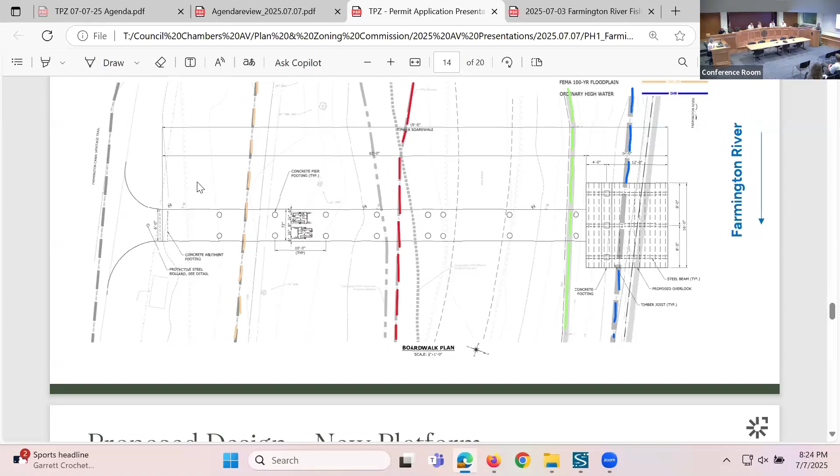Maybe down the line, Farmington Land Trust, as money becomes available, funds become available, they could add benches. In terms of the rating and the loading, from what our structural engineers tell us, you could probably pile 3 cars on top of that and it wouldn't go anywhere. So it's very conservatively designed. Even a lot of the footings, we've over designed them so that they stay there and don't move.

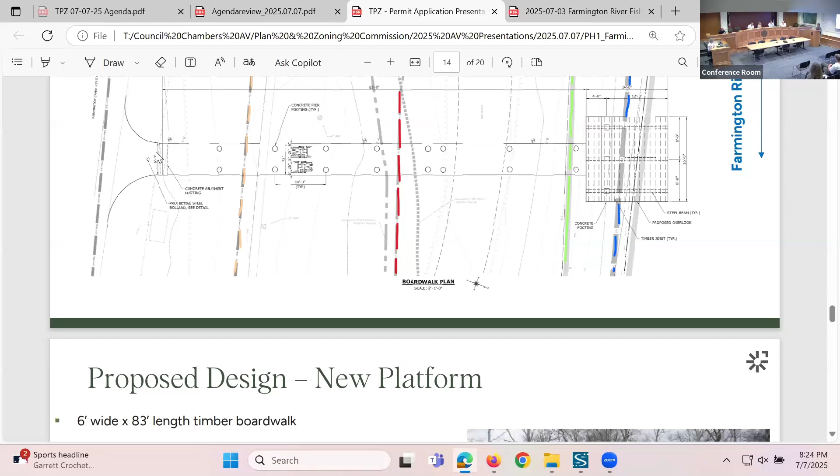And then in terms of the place on the paved trail that the entry point is going to be, can you describe what - I know in that section of the trail there are points of residential properties abutting the trail. Do you know what that looks like at that point in the trail in terms of that? Let's see, from the aerial, yeah, I don't know if I have any photos.

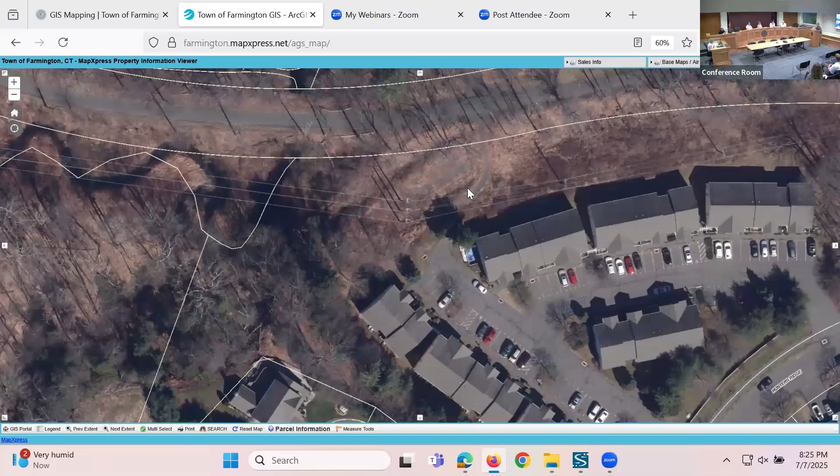You have, I believe, either condominium or apartments or townhouses that go up the hill. There's a hill rises, right, well vegetated during the summer, well screened. There's actually some trails that come back from those apartments down to the trail so those folks can access it. I don't believe their view is going to change much - if anything, they'll have more of a view to the river because you're going to clear some of the saplings out there. But I don't have any photos directly from those residences out that way.

Great, well that's all the questions I have at this time. Thank you.

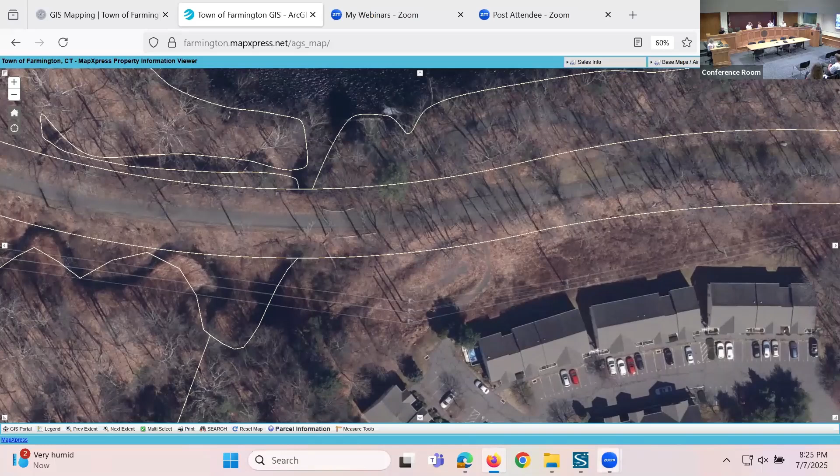Bruce? Thank you very much for your presentation, very thorough. I think my fellow commissioners have asked all the questions I had in mind. Okay, thank you. And Dave?

Yes, thanks for the presentation. This is more of an observation platform rather than fishing, is that correct? Yeah Dave, given the height, usually for platforms to be considered fishing they have to be 8 foot or less over the water. We're at 14, so yes, this is considered really an observation platform. Hence the reason we're still maintaining the fishing area down below.

We don't want to lose that component for others that do utilize this area currently for fishing, but this is considered an observation platform. Okay.

And are there plans to close off the pathway for a short time while it's being done? Yeah, so there will be signage. We've received permission from the town to utilize the existing trail for our construction access, and one of the things the town required was that there's going to have to be signage and somebody, a flagger, out there while any equipment needs to go from Railroad Avenue Extension to the gravel trail. And then at the gravel trail there'll be signage posted that the trail is closed for use.

Great, all right. Yeah, thanks. It's nice to know they're going to fix the damage that's been done by the old spot, and this will be a nice addition. Thank you.

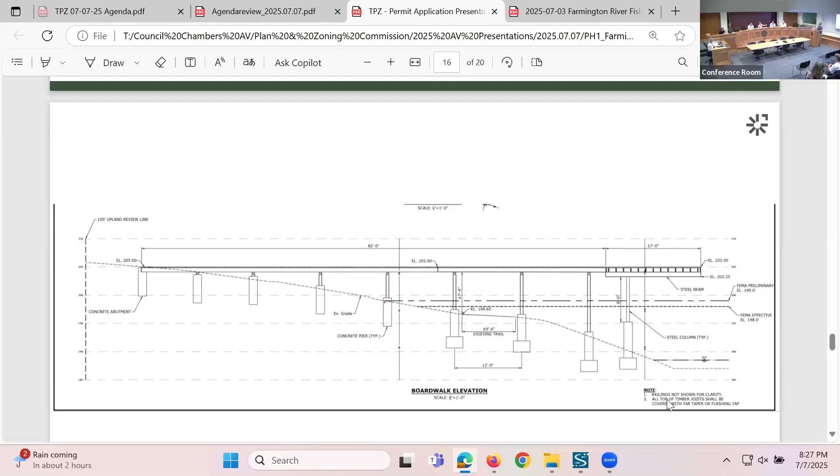Okay, my questions mostly have been asked, except for one. Is there going to be any sort of signage on the trail directing people, or is it considered that it will be obvious enough? I don't know if Farmington Land Trust has any ideas for signage, but it's going to be very obvious. You're going to see it as soon as you get up in this area. But there's always opportunities in the future for signage, I would think.

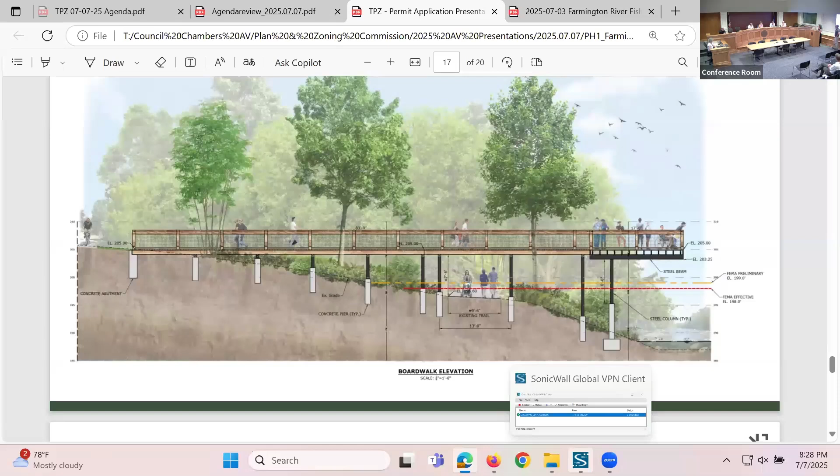Oh sure, you could absolutely. Just in response to that question, we do plan on having a kiosk at the entrance. We have a high school student who's going to do a capstone project and create that for us. We'll also have signs on the actual boardwalk, safety signs about no partying, and those kinds of things. And then we'll also have a sign for those who have donated to the project at a certain level, so there'll be one down by the river and one up at the top.

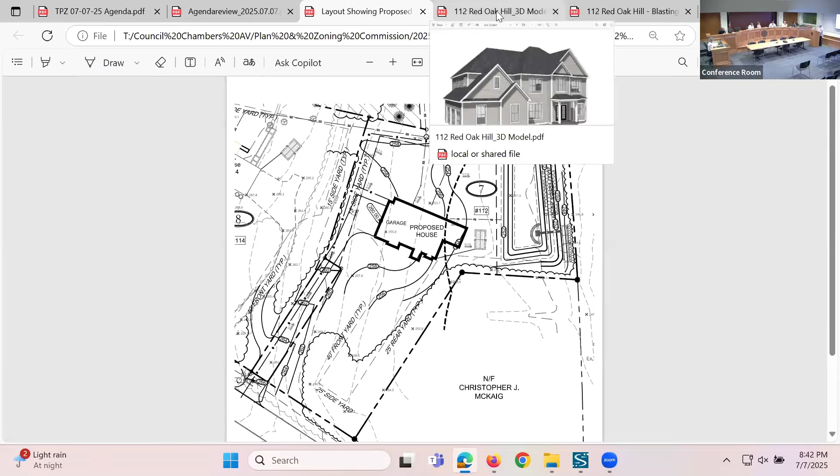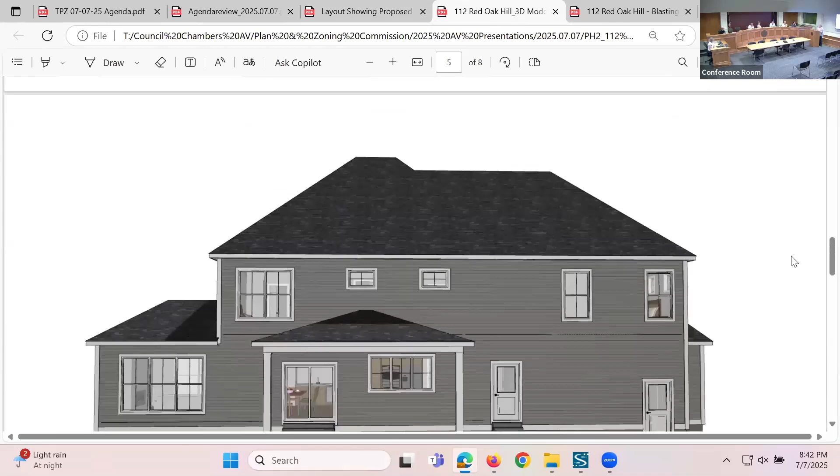We do have a proposed client for it, and this is what they've customized for themselves. So we needed to make sure the commission was on board with the size and location and such.

Annie, what development is this ultimately part of? This is all part of Seven Stones, which currently has 6 lots coming off of Copper Mine Road, which is Dominique's Court. Then 112 and 114 are both part of that same HOA. Just the way it was approved, for the frontage we had to separate the back 2 lots, 112 and 114.

The commission may remember reviewing Dominique's Court when it came through — it came through twice, once as a 4-lot subdivision and then as a 6-lot subdivision. I'll get it right the third time, I promise. I'm gonna see if my lot lines show up here. There we go.

So Dominique's Court has access off of Copper Mine with 6 lots. And then these 2 additional lots, 114 and 112, will have Red Oak Hill Road addresses because there's no access off of Dominique's Court, but it was permitted at the same time. Because of the wording of our expanded home regulation, since it's not actually accessed off Dominique's Court, it doesn't have the benefit of being part of a roadway that has 6 or more new homes.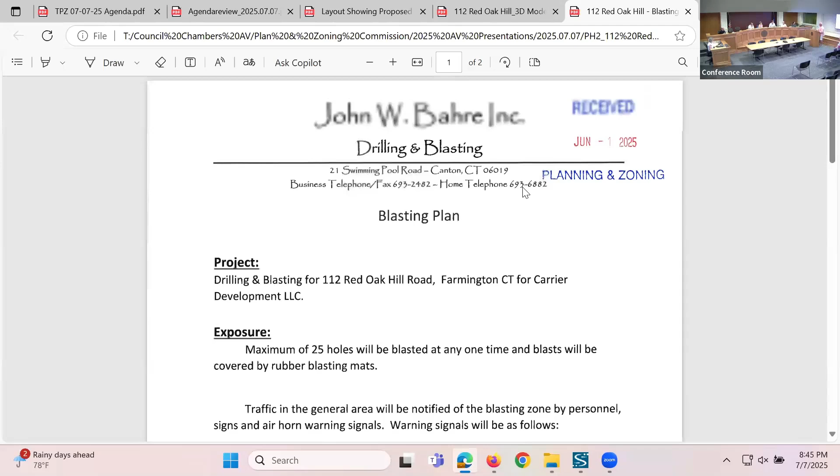At this time, we believe the blasting needed for 112 Red Oak will be confined to the foundation area only, roughly a 30 by 50 area at full depth, not so much in the garage where there are shorter footings. It'll be similar to the lots we've done on Dominique's Court as far as duration — maybe 3 to 5 days of drilling to get the job done the way it looks right now.

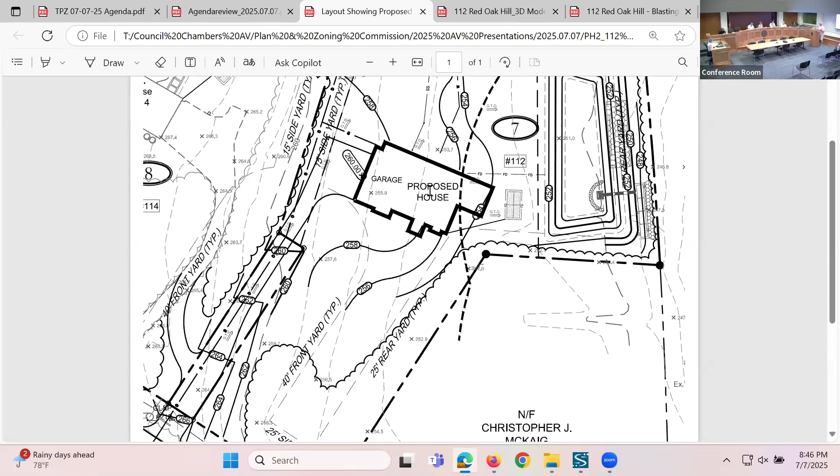There's still a little more looking to do to make sure water lines and stuff like that can get in there, but we haven't scoured it all over — just looked at the immediate area to confirm some kind of blasting needs to be done there. Of course, we'll follow all state and federal regulations like we always do, and we'll follow all your town regulations in the process.

We'll work with a 9 a.m. to 3 p.m. blasting window to try to lessen the burden on everything going on in the area. This one, being set off the street a little farther, is probably a little easier than some of the others. But all in all, still very typical of what we've been doing in that area — the 2 other lots we did on Dominique's Court should be very, very comparable.

I guess at this point, if you've got some questions, I can try to answer them for you.

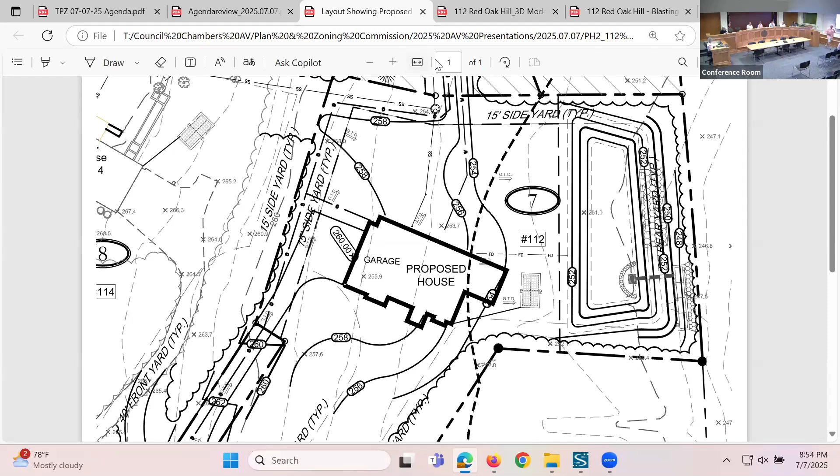Okay, thank you, my questions have also been asked. So it's time to open it up to the room. If anyone has a question or comment regarding the Carrier's request for a large house and blasting, please come on up. Now is the time to speak.

Okay, no one in the room. Anyone online, Shannon? If anyone's called in for the application at 112 Red Oak Hill Road, please raise your hand using the feature in Zoom and you'll be acknowledged to address the commission. Madam Chair, there are no hands raised. Okay, thank you. Shannon, have we received any correspondence? No, there's been no written correspondence on this application.

Okay, any other questions? Last chance, last opportunity? Commissioners, nothing? Okay, then it is time to close the public hearing. What do we think, are we ready to take a vote, commissioners? Do we have any discussion we'd like to have? Have all the questions been answered?

Before we go to take the vote, just on the size of the house, it's 50% bigger. I know we've done other ones. Is it representative of the other ones in the area? Because when we listed the other houses, it did seem to be substantially larger. Just thought we should touch on it before we call it a day here. I do see that there's one that's 3,000 versus 3,600. What was 114? Was it the larger one?

You could take a look and determine whether or not it's comparable, but the agenda review is here. It also says it's consistent with the size of homes in Dominique's Court, and if it's under the same HOA, that's really what I was going with. Comparable means it should be the same size. But the houses on either side of it are much smaller, even though it's part of the same HOA. You belong to the HOA, but you're not allowed to have that size house because it doesn't fit.

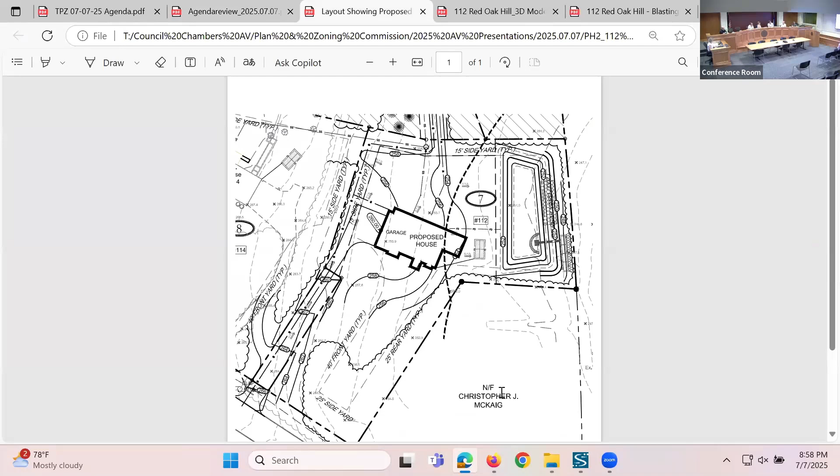Shannon, can you show, they indicated the home was set further back. I was going to say, on the aerial. Unfortunately the property lines aren't showing up on the aerial, so it's less helpful spatially. So here, these are the lots. This is lot 112. The home is set back where the writing is. When you go back, you can see there's kind of a dog leg to it, here's the roadway, this is the right of way for the road, and then this is the angle point. That's where the house is, back on the angle point.

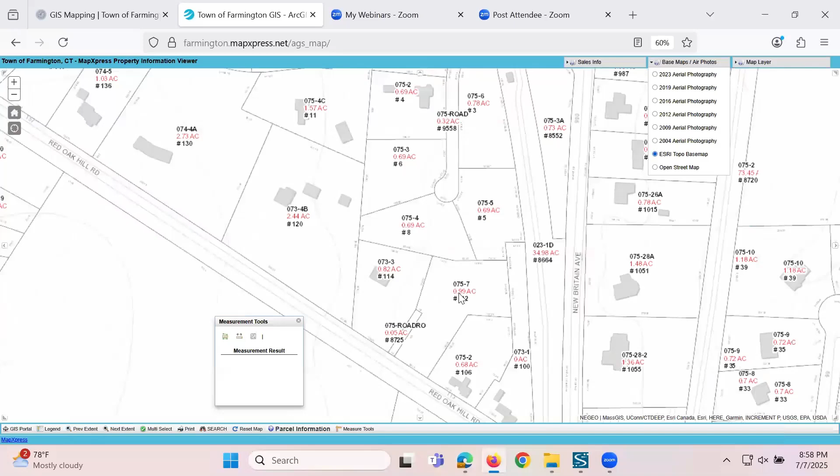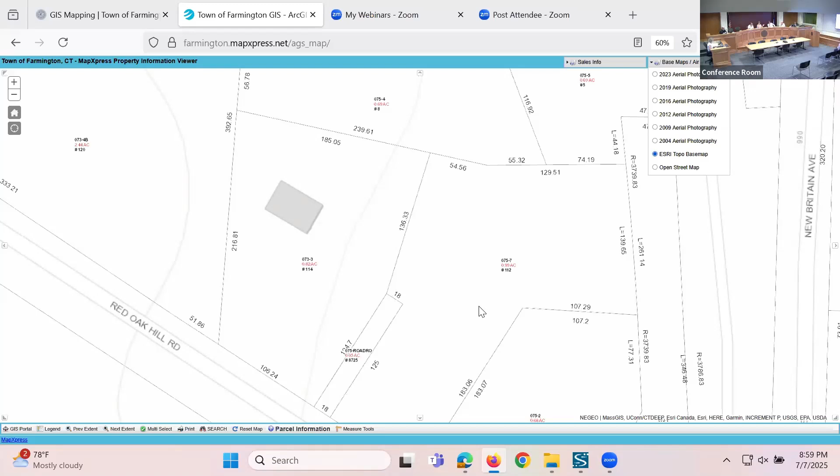Commissioner St. Germain has his hand raised. Dave, go ahead. Just a question, I remember them saying it was set back about 100 and something feet from the road, 115 feet or so? Correct. But the question I had was, is it a shared driveway? Is this driveway owned by the HOA? It will fall under the HOA documents and requirements. I can't remember the nuance as to whether the HOA will be plowing this driveway, as it's this shared portion, or if it's shared between these two owners. We did work through that — I think it's all part of the HOA document. These two units are included with the other six as part of the HOA, so the rights and responsibilities are shared accordingly.

Okay, that helps clarify. Yeah, I just thought we should touch on it briefly. No, that's a good point. Thank you for bringing that back up.

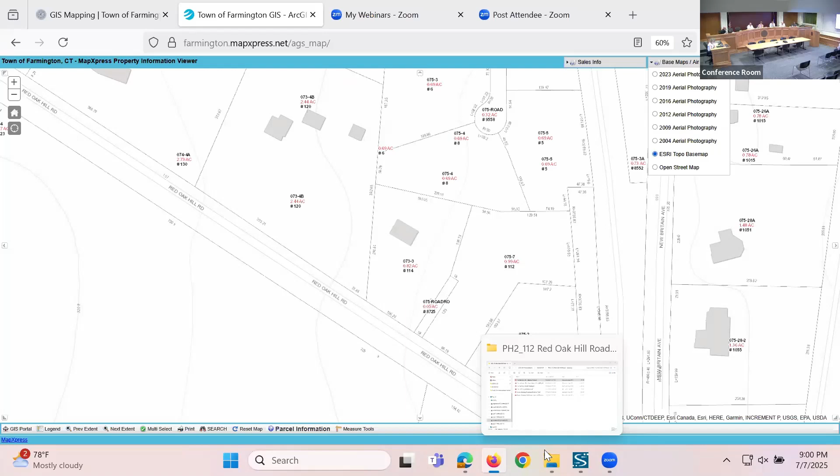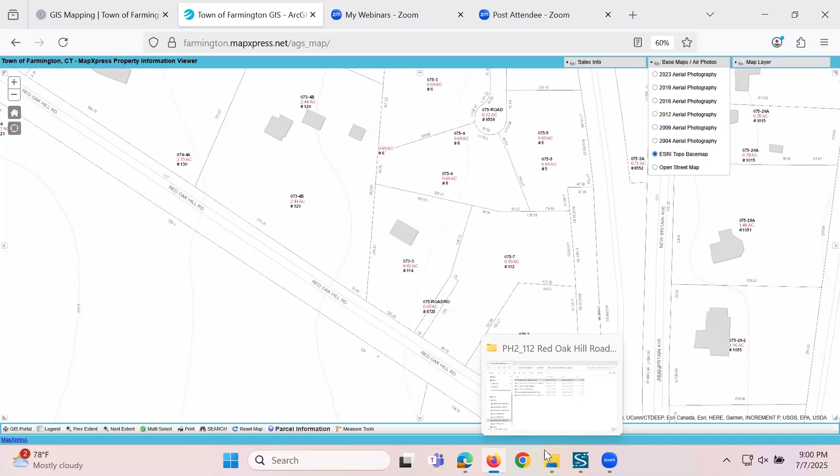If we're ready to vote, I need a motion and a second, please. I make the motion that we accept the application for Carrier Development LLC for a special permit and site plan review for an expanded home in excess of 2,400 square feet living area and 3,200 square feet total area, and drilling, blasting, and rock crushing for a new single-family dwelling at 112 Red Oak Hill Road, R30 zone. Second. All those in favor? Aye. All those opposed? Any abstentions? The motion carries.

Thank you, thank you for your presentation. You did just fine. You'll work on it — practice. Third time's a charm, right?

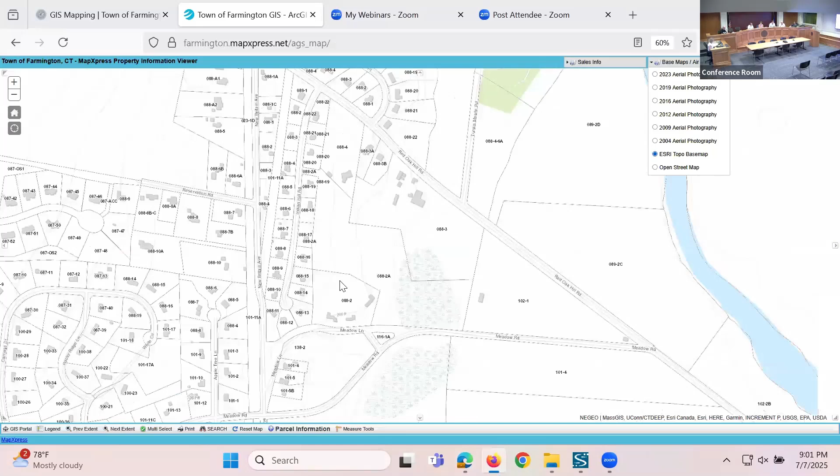First up is our Riverside Cemetery in Farmington. This is the cemetery off of Garden Street. They have a formal application in front of our Inland Wetlands Commission, so I wanted to make all of you aware of the work they are proposing to do. Let me bring this up — let's see here, Farmington Ave, I'm close, there we go.

The interior roadway network is being repaved in kind. The exterior perimeter roadway is also being repaved, but the Cemetery Association is working with us on additional improvements that are needed — they wanted a slightly wider driveway. With that, we've requested they remove the designated paved leak-off areas for stormwater. If anyone's walked or driven through the cemetery, you'll know the driveways come down, there's a gradient on these driveways down and around this bend, and there's a paved leak-off, and the same for this driveway down and around this bend and a paved leak-off, which results in a point discharge location for the stormwater runoff into a fairly steep embankment off into the Farmington River.

So what they're working on with this perimeter work is they're going to widen a little bit. They actually have room to widen the pavement edge a bit in towards the cemetery, and they're going to widen in both directions. There is room to work there, and then put a stone edge for the runoff on the river side — it'll be a heavier riprap stone.

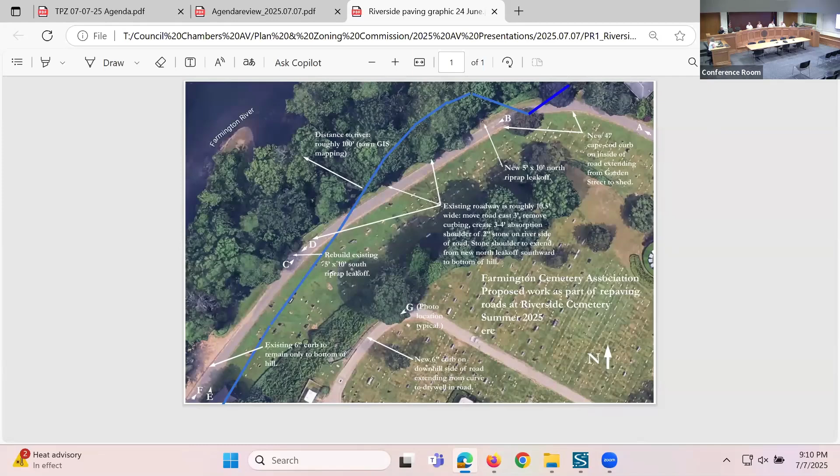And the prompt for us considering this is there have been complaints that you have been receiving related to actually that. Are they aesthetic related complaints, or running-a-business complaints, or both? Honestly, I think some of them are more aesthetic, and I think the commission needs to determine whether or not that's germane.

Sometimes it's probably about a 50-50 split. Some of it is solely aesthetics, and this is not permitted so it shouldn't be allowed, and I don't want it on my street. And some of it is that their crew is gathering here, in which case then we get them on the home business end of it, right? They shouldn't be operating a home business.

But even if it's an individual whose work truck or work van, which I just got a call about today, and that individual is parking it on the street on a curve and creating a sightline issue, I'm going to have to take a look. But it seems, if it's a regular pickup truck that just has a commercial logo on it, and they're not operating the business out of their home, it's their assigned work vehicle that they bring home in the evening because that's what they use.